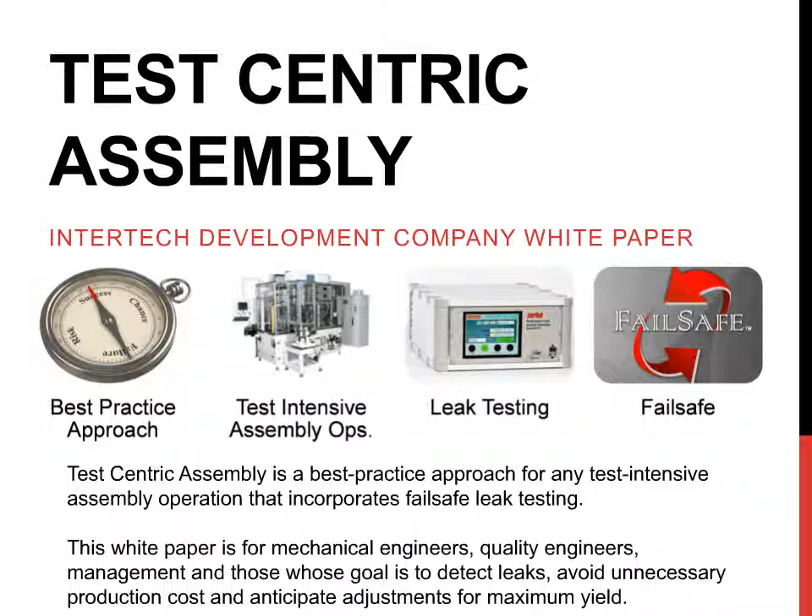A new white paper from Intertech Development Company explains the concept of test-centric assembly, which is a best practice approach for any test-intensive assembly operation and incorporates fail-safe leak testing. This white paper is for mechanical engineers, quality engineers, and management.

The goal of test-centric assembly is perfection. The result is improved throughput, yield, system uptime, and time to market. Founded in 1973, Intertech Development Company is a world leader in test-centric assembly, specializing in automated leak and functional testing, with 7 patented mass flow and hydraulic technologies, as well as proven expertise in helium mass spectrometry.

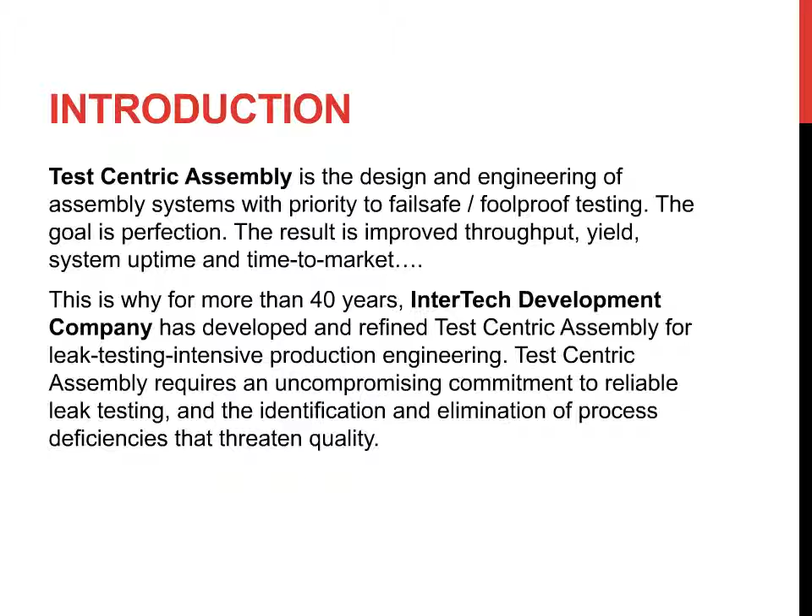Test-centric assembly is not a product, it is a process, and it requires that test engineers be granted equal place on the teams that design and engineer production and assembly systems. If you lose control of quality in a production process, the consequences can include the direct costs of rework, reinspection, and retesting of rejected shipments, if the shipment was not scrapped. There can be product recalls, and this can drive a manufacturer into bankruptcy if you're not careful.

There are myriad negative consequences of quality failure, such as the permanent damage to corporate and personal reputations, or the need to completely re-engineer a production system. And all of this is entirely avoidable with test-centric assembly used as a strategy for your company.

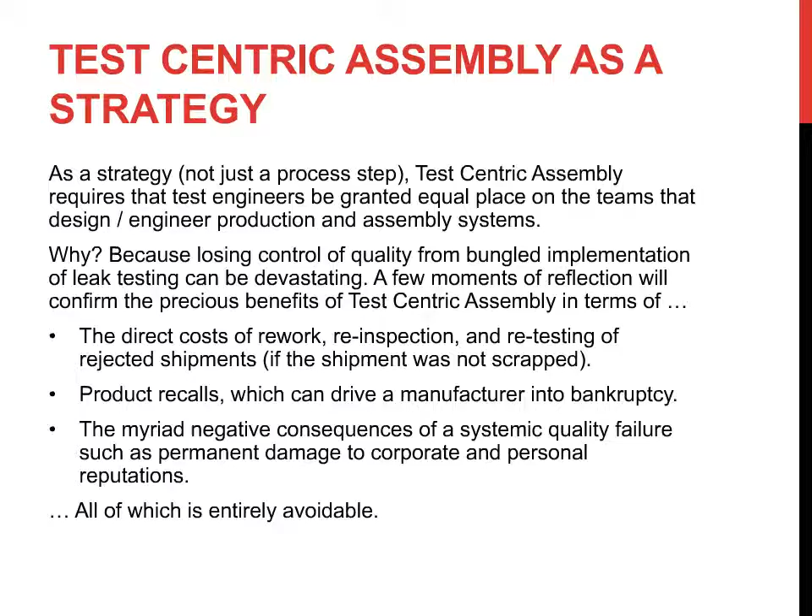Test-centric assembly asks you to consider testing up front in the design of the assembly and production process. The goal of perfection is a disruptive concept. It requires commitment of all teams involved in the production process. For reliable test results, the entire system needs to be treated as a gauge to have confidence in test results.

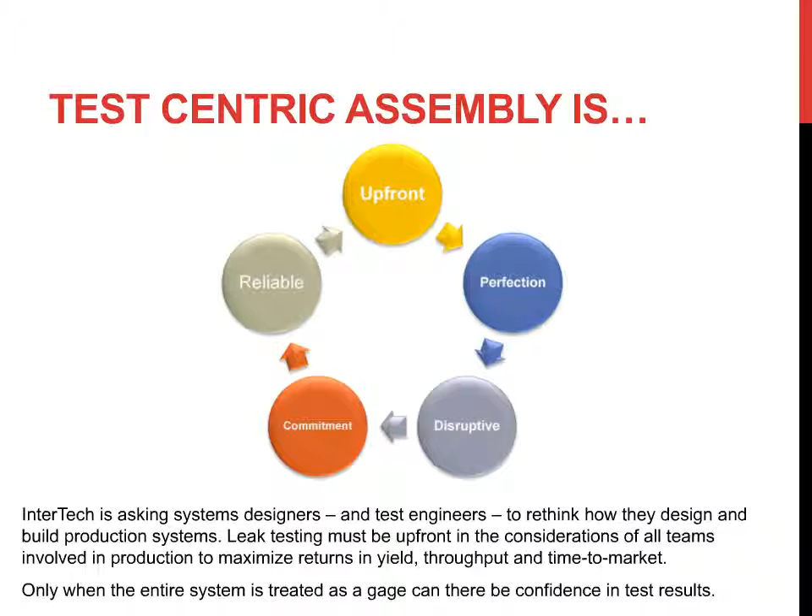Return on investment for test-centric assembly is found in many ways. It has a ripple effect on the entire manufacturing process. Rework is cut by 20% or more, partly because good parts are not misclassified as bad, and partly because problems are identified earlier and fixed sooner. Perfection is attained in the details of gauge repeatability and reproducibility, creating reliable, useful feedback for more efficiency.

Process improvements, especially with mass flow leak testing, create faster processing, which requires fewer test stations. This can lead to capital expenditure savings of 50% or more. Test-centric assembly is insurance against blown budgets and protects your reputation.

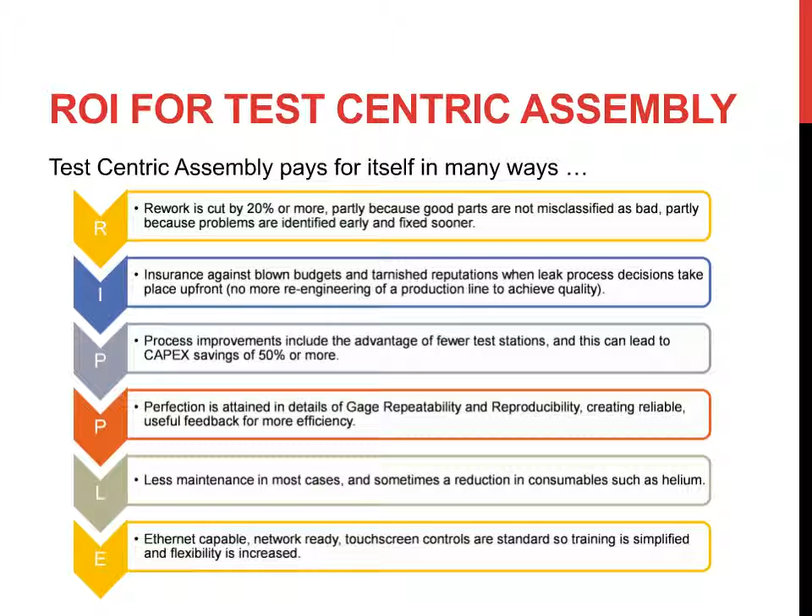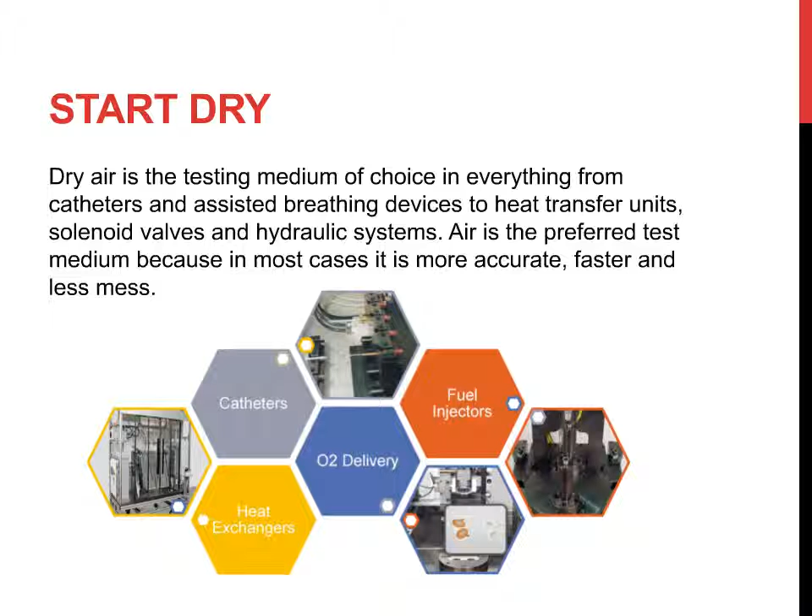Intertech's white paper explains how to start dry. In other words, dry air is the testing medium of choice in everything from catheters and assisted breathing devices to heat transfer units, solenoid valves, and hydraulic systems. Air is the preferred test medium because in most cases it is more accurate, faster, and less mess.

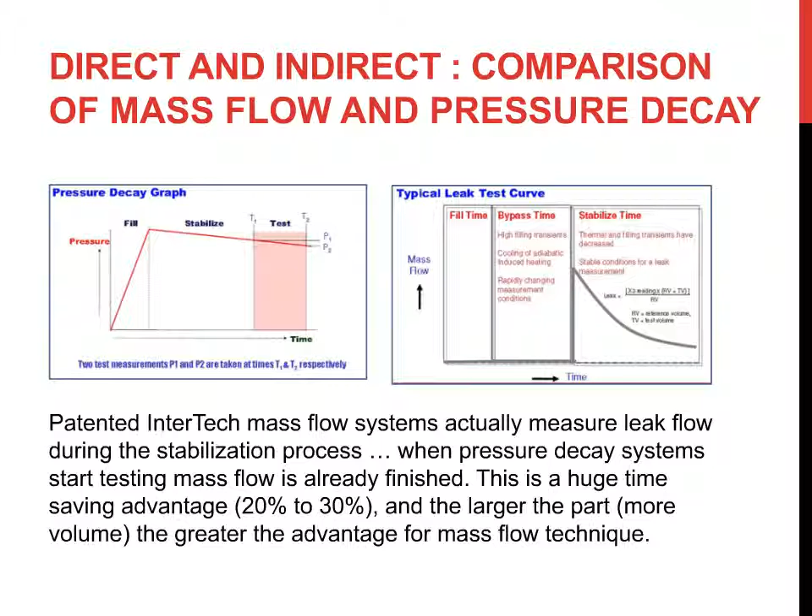In its white paper, Intertech compares mass flow and pressure decay leak testing. Intertech has patented mass flow systems that actually measure leak flow during the stabilization process. When pressure decay systems start testing, mass flow is already finished. This is a huge time savings advantage. It can save up to 30%, and the larger the part, more volume, the greater the advantage for mass flow techniques.

Intertech's white paper addresses many issues, including the importance of precision fixtures. Production techniques for test systems simply won't do. Automation engineers are experts at creating fixtures for rapid assembly throughput, but may be surprised to learn their techniques are detrimental to fail-safe leak testing. For example, when automatically driving screws through an assembly, it is normally best to have a fixture with some float around the holes, so screws can center themselves. However, this can lead to seal creep on a test fixture.

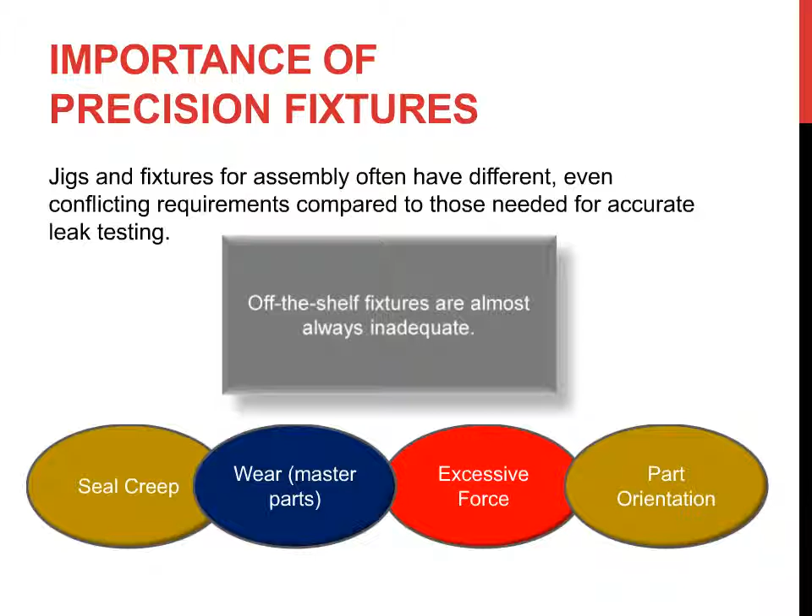Testing creates wear, so the finish on a test fixture may need to be superior to those for assembly. Clamping pressure can mask a leak. Sometimes a part must be tested in the same orientation it will assume in the field. Automotive valves and respirator components for assisted breathing devices often have this requirement. For all these reasons, and to avoid re-engineering costs later, engineers are well advised to consult with test equipment suppliers on fixture design before production plans are frozen.

As Intertech Development Company explains, test-centric assembly is the culmination of best practices in leak testing and the latest technology to ensure optimized throughput without adding unnecessary production cost. Test-centric assembly, which embraces fail-safe leak testing, is a major insurance policy on the reputations of companies and products.

Engineers with leak testing expertise are vital to system design of any production line where testing is essential to the production process. With test-centric assembly, management is empowered to be proactive and not forced, so to speak, to react to relentless demand for heightened tolerances and traceability. When a machine builder offers to provide testing, make sure they understand how to detect leaks and improve the process with test-centric assembly.

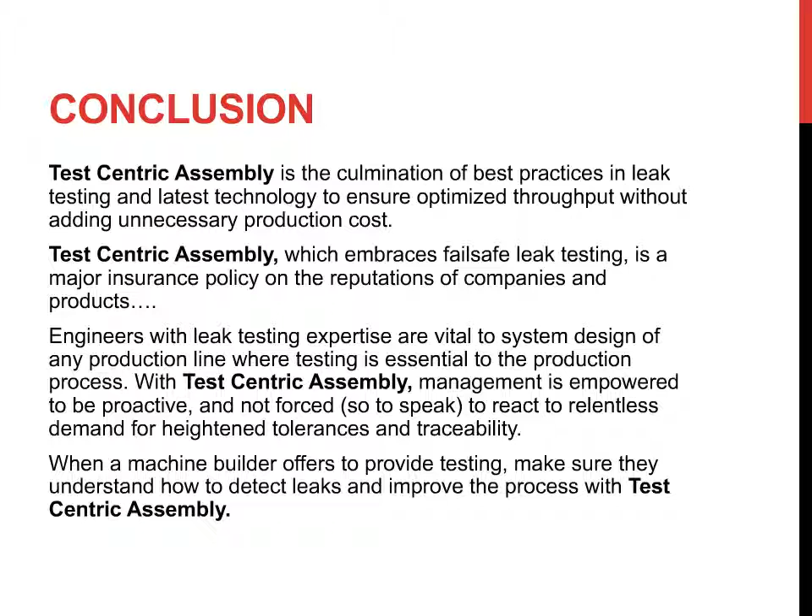This has been a presentation about the Intertech Development Company White Paper on Test-Centric Assembly.